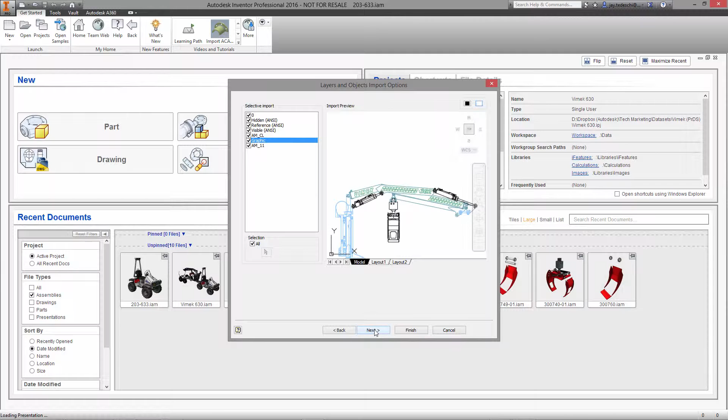Today we're going to take a look at mechanical concept and layout design using Inventor Pro 2016. We're going to start here in Inventor by importing an AutoCAD Mechanical layout drawing. For lots of companies and for lots of us, initial concept design and layout is done in a 2D design tool, and there are very few 2D design tools that are as good as AutoCAD and AutoCAD Mechanical.

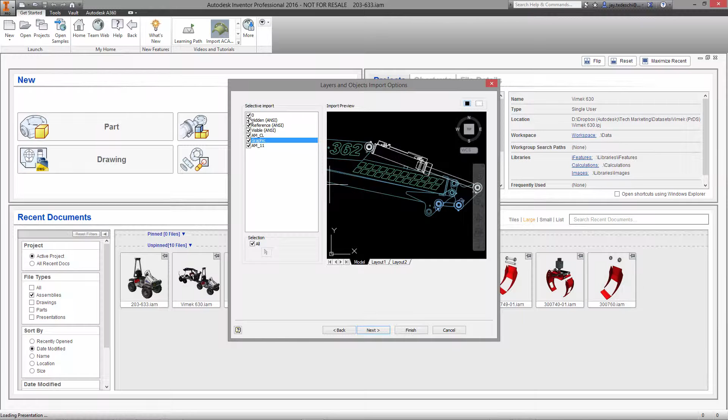What we're doing here is utilizing one of those layouts, and it's a layout where we utilized both layer and block structure in the AutoCAD drawing to define assembly structure. That assembly structure can be passed intelligently into Inventor, into a 3D environment. So we're going to show you here how to utilize that existing DWG data as the backbone of a fairly

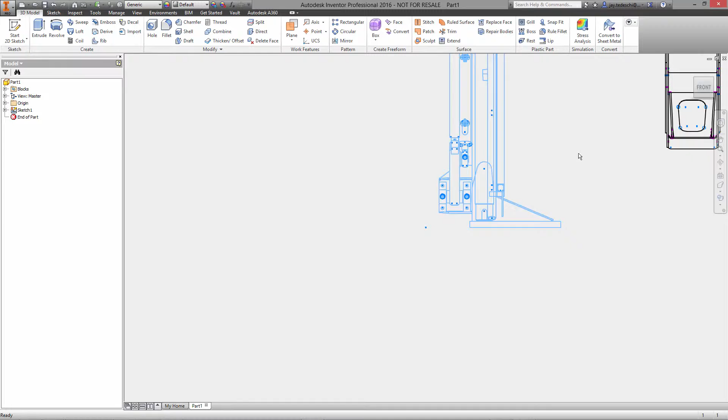complex Inventor assembly. So we're starting here by pulling the AutoCAD DWG data as well as the block data into an Inventor part, and more importantly onto an Inventor sketch plane. We'll start by saving this. So this is going to be our layout.

It's not technically skeleton modeling with regard to how skeletal modeling has been defined by industry, but it is in fact a skeleton type technique, as we're going to have a single IPT file which is driving our entire assembly. Now, as you can see, all of the blocks which were originally defined in AutoCAD are now also defined here in Inventor.

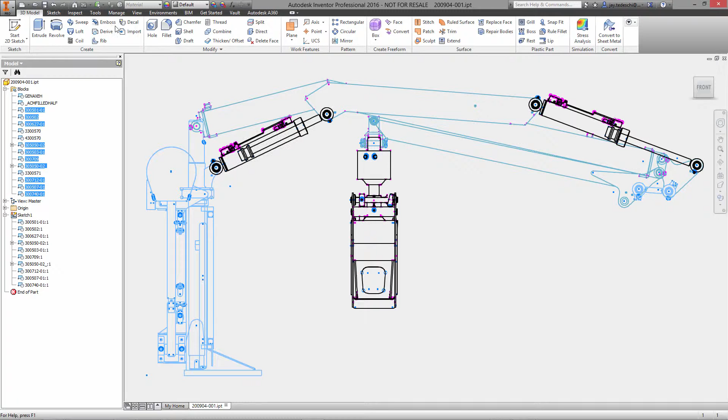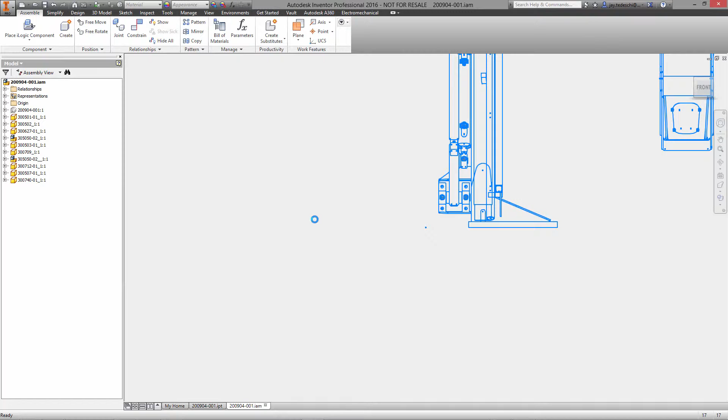Now we're going to use the Make Components command to basically write out an assembly document that has all of these IPT files and these blocks, which were just blocks in AutoCAD. They're referred to here on the IPT file as sketch blocks, but now once we push that to an IAM file, these are automatically turned into IPT files and IAM files based on how deeply nested those blocks were. And as such, these will form the backbone of our new assembly.

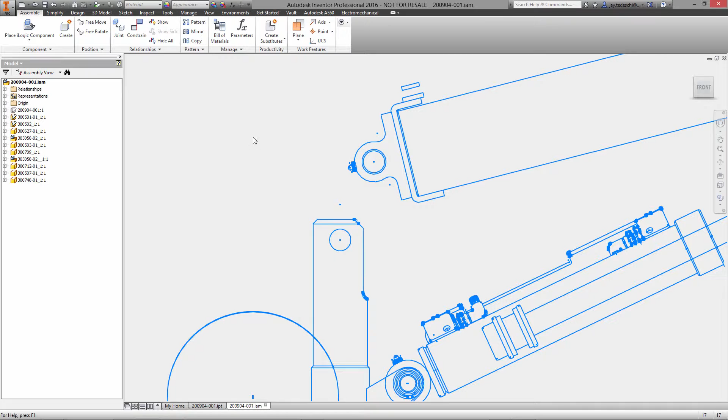So we'll start by grounding a couple of the components which will not see any motion. And now we can start to assemble the structure of our assembly utilizing assembly constraints. So we'll add a mate constraint between those two axes. And now you'll note that I can essentially test the motion of my assembly by dragging the component in Inventor, just as I would with any 3D component.

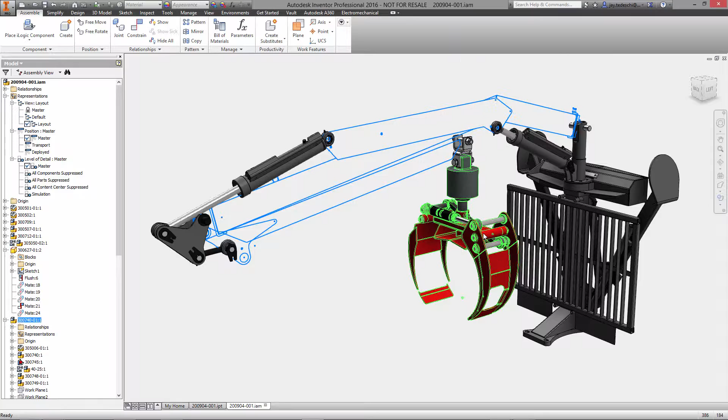So over time, we have fleshed out the assembly, and again, this is all based on that initial 2D Inventor IPT file that was created from the AutoCAD drawing. Now what we're going to do is utilize some new methodologies with leveraging AutoCAD data, and this is called DWG underlay. Now we're going to use this drawing that we have of the gripper side plate to essentially poach

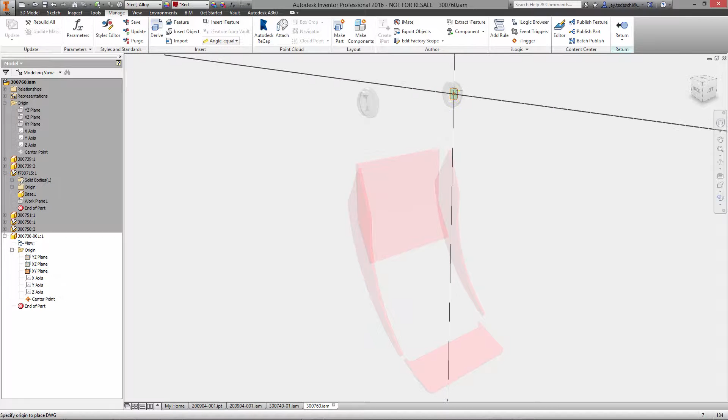data. Now the nice thing about using DWG underlay as opposed to the paste methodology that I used initially with the AutoCAD drawing is that this is a live link to the AutoCAD data. So we're essentially just moving the entire AutoCAD drawing into position where we want it relative to the rest of the components in our Inventor assembly file here.

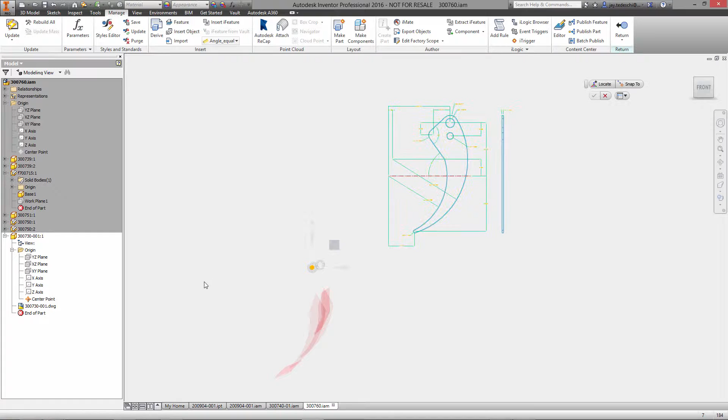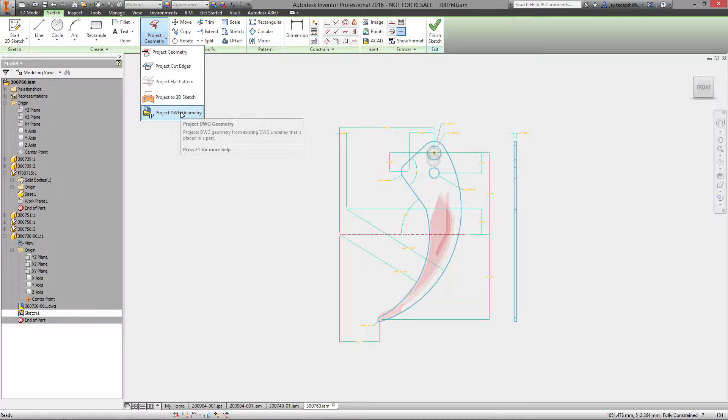We'll use this locate functionality to pull it into position. Now, snap to, and let's pick this point right here. And now it is positioned relative to the rest of the components in the assembly where I need it to be. So to create the part based on this data, we'll create a sketch, and now we're going to use a special type of projection. It's to project DWG data, maintaining a live link to that data.

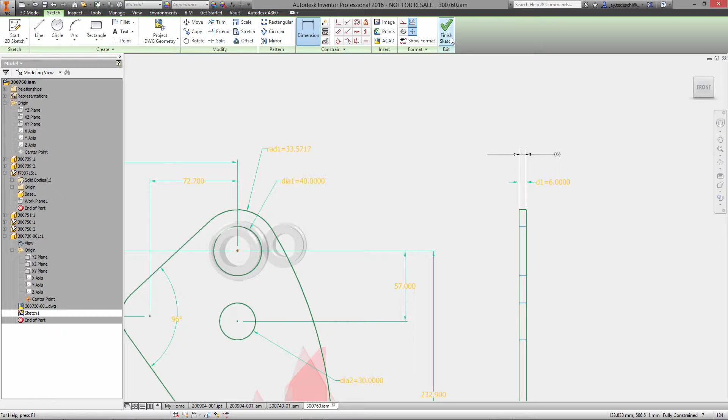We'll grab enclosed loops. We'll grab these circles here. We'll grab the outer profile there. And let's zoom in a little bit. Now what we're going to do is add a dimension. Using DWG underlay, we're not allowed to utilize the dimensions that are on the AutoCAD file, but we can add reference dimensions here in the sketch environment.

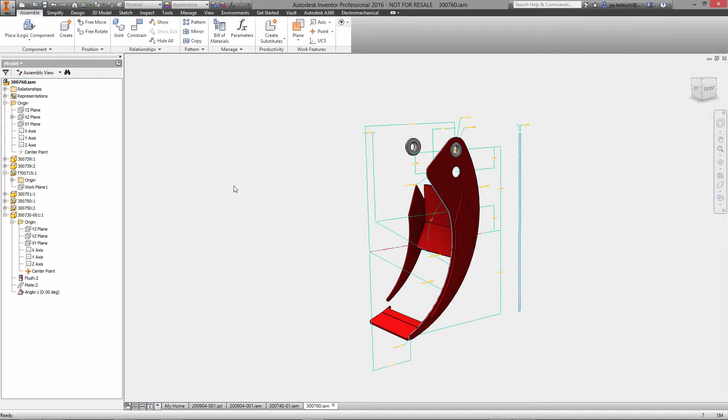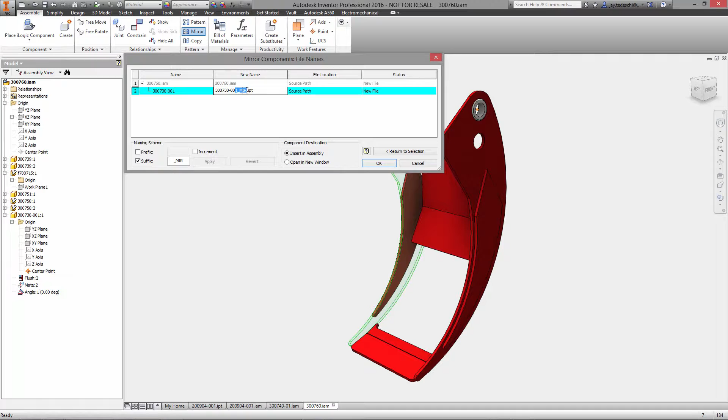That reference dimension is live to the DWG data, and it's also going to be used to drive the thickness of my plate. So we'll select that reference dimension there. So we now have a 6 millimeter thick plate. And with that, let's turn off the visibility of the AutoCAD DWG file itself. Go ahead and mirror our existing gripper plate. We'll mirror about this plane. Let's change the name here to -002 instead of mirror, which is the automatically assigned suffix.

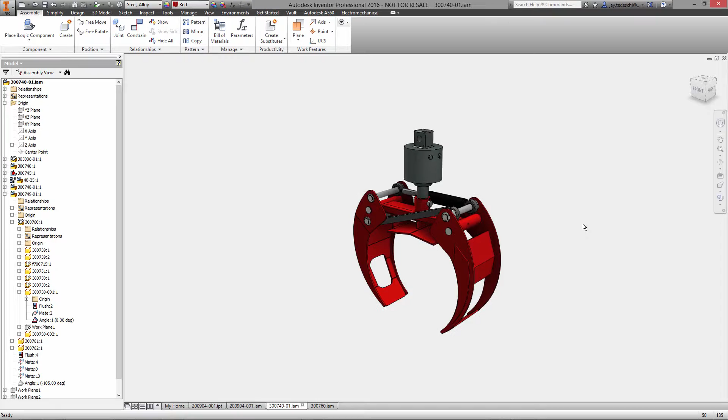So very quickly now we have created our gripper geometry directly from the DWG file. Now you may wonder what's the advantage of using this as opposed to the methodology we utilized in the first place, and I'm about to show you that. The advantage is that, as I pointed out previously, DWG underlay maintains a live link to the DWG file, which for many companies is still an active document.

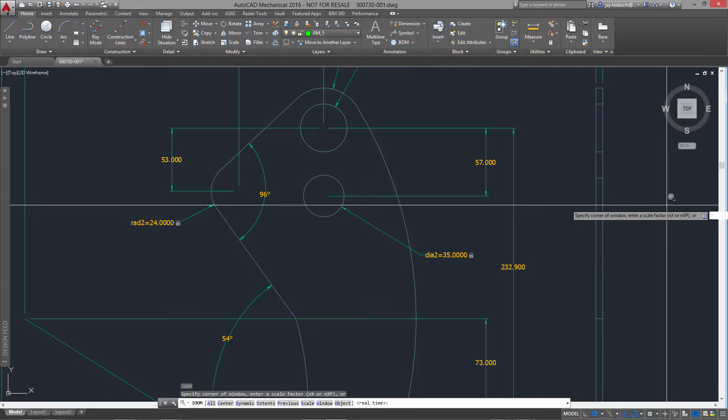There's no right or wrong way to do design. The right way is the way that allows you to be productive, and for some companies that productivity hinges on the use of AutoCAD as their design tool or their layout tool. So by modifying the dimension here, changing from 30 millimeters to 35 millimeters in the DWG file, when I get back to my Inventor assembly and update, you'll see that the change is driven automatically. As the DWG file changed, so does the IPT file in Inventor, which is based on it.

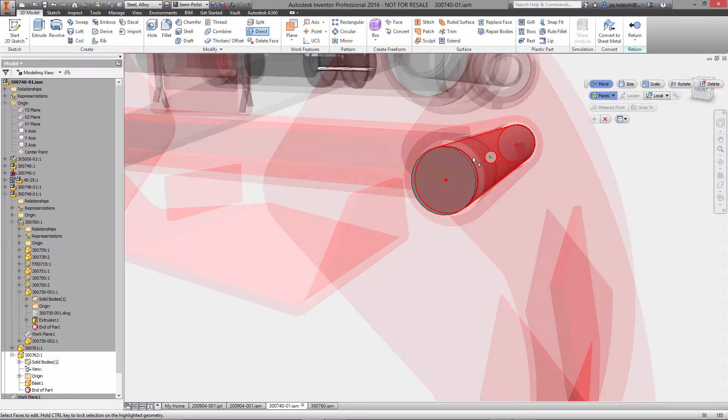Now we'll utilize direct editing here on the model to change the diameter of the shear pin that passes through that hole, and we know it was 35 millimeters, so let's go ahead and just change the diameter to 35 millimeters. We match the diameter of the hole in our gripper plate, and that's it.